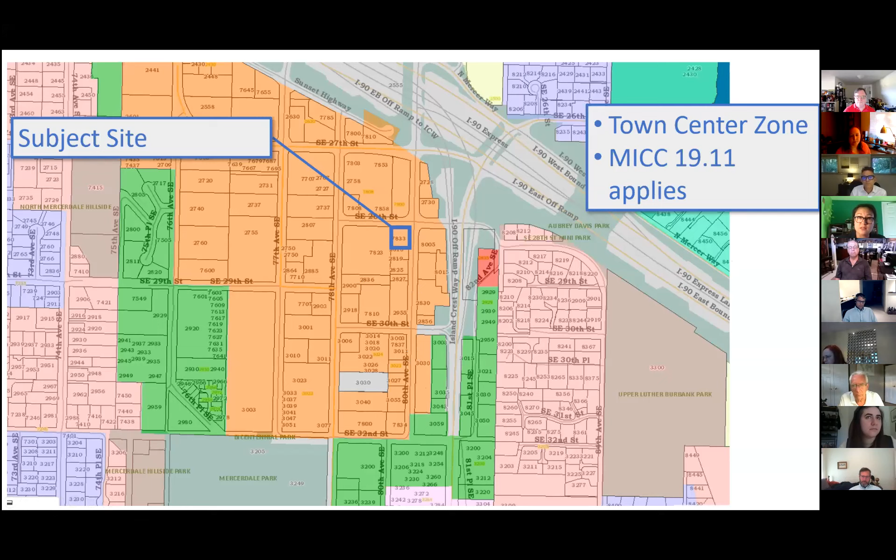Since the site is within the town center zone, Chapter 19.11 of the city's code applies. The proposed scope of work is to replace the fuel canopy and pumps, as well as add a small addition to the convenience store on site and redo the exterior of the convenience store.

I'll go over the code point by point once the applicants have had a chance to speak to the project, but I'd like them to introduce and tell you about the design before I dive into code.

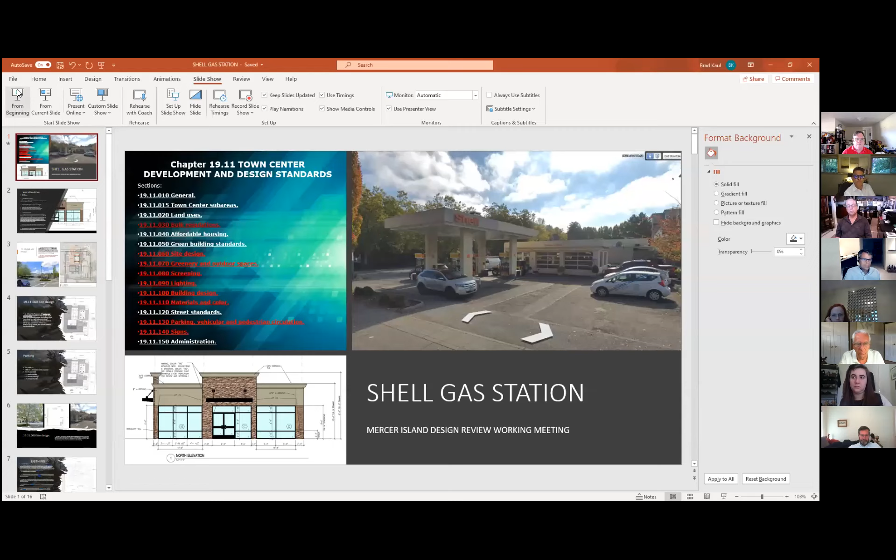Okay, so like Robin was saying, I brought the code into the different slides that I have here to go point by point through it. I don't know if that's the proper way to go through this, but maybe first I'll find a couple of slides here of our site plan.

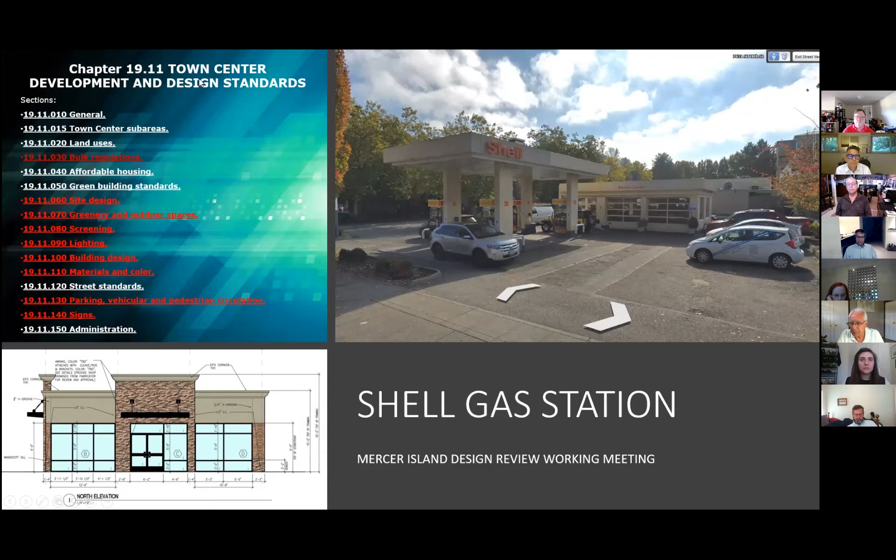Just to review the existing conditions, I guess that's what this plan is. So here we have our existing canopy and fuel pumps. Right now, there isn't an existing grocery store or convenience store. It's a two-bay auto repair shop with a small office and 2 toilets that are accessed from the exterior.

And then as far as, you can see the picture of the existing pumps and the existing old repair shop building. So what my client would like to do is replace the existing fuel pumps with new ones.

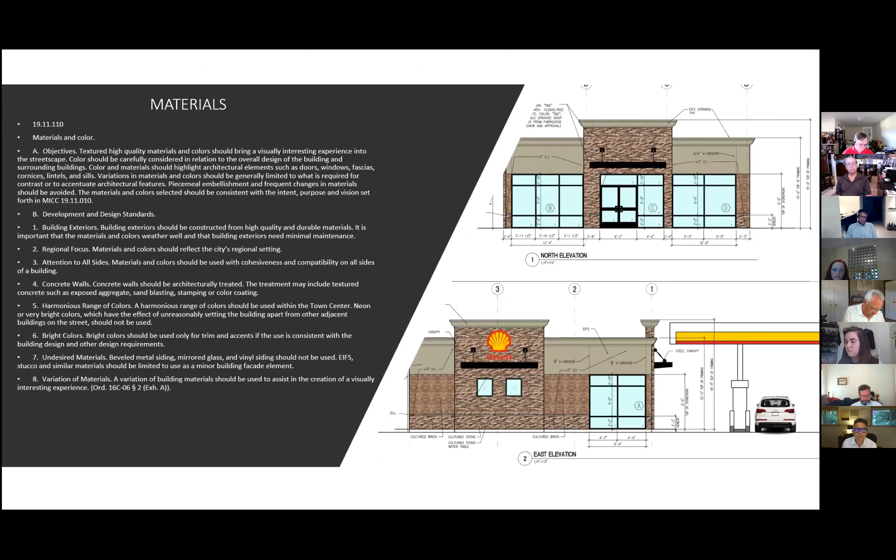I don't know what we should do next - go through the code, go through individual pieces. What do you think, Robin? Or does anybody have any questions?

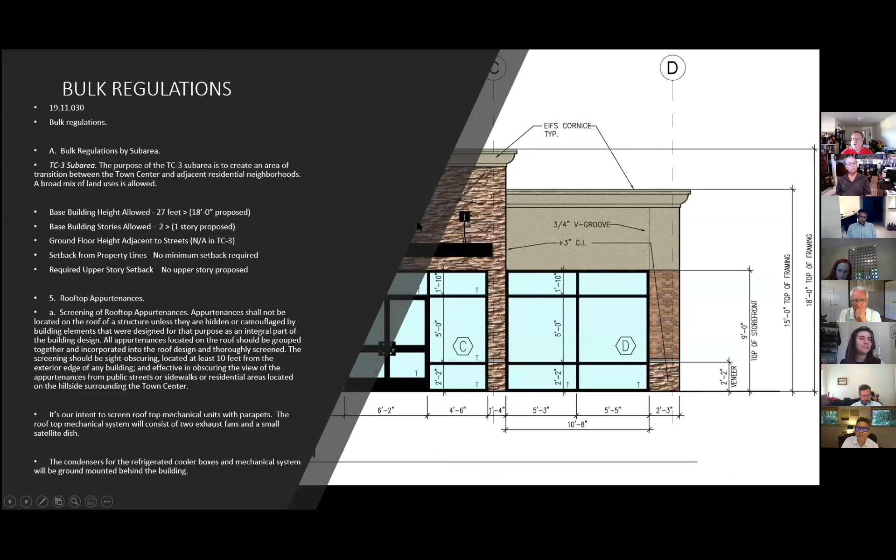Yeah, if there's any questions about the design choices, maybe that's a good next step. Otherwise, I'm happy to dive on in and start talking code. That sounds good. Commissioners, did you have any questions?

I think I'll come back to them once I've heard from you, Robin, though, since some of them are tied to code. My guess is you'll answer a few of them, so I'll wait. Hopefully, yeah, I was going to do exactly the same thing. So just signage and colors and that sort of thing.

So should I stop my share? I can come back later. Once Robin's done. I think Commissioner Grambois has a question now.

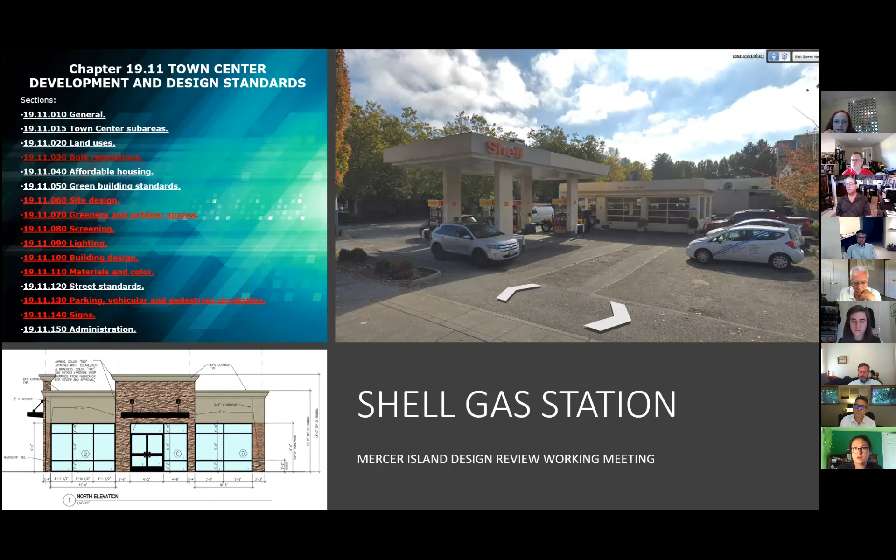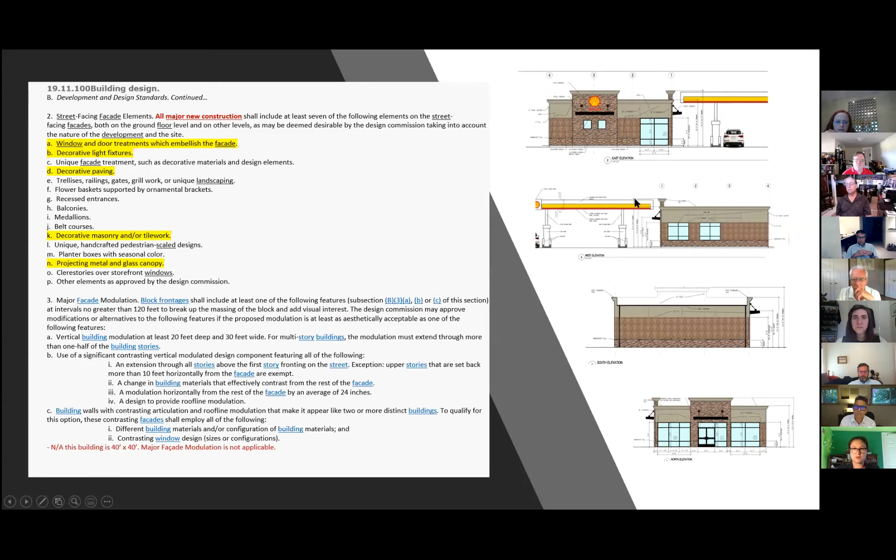Is there still going to be an existing service station, or is it going to all be a convenience store now? No, there will still be existing service, the service station remains, so we'll have the pumps, they're shown here. Right, the gas. But there'll be no auto repair, it'll be all convenience store. Okay, no more auto repair. Okay, thank you.

Okay, Robin, go ahead please. Go ahead. Okay, thank you. I'll reshare my screen here. Okay, can everybody see my screen now?

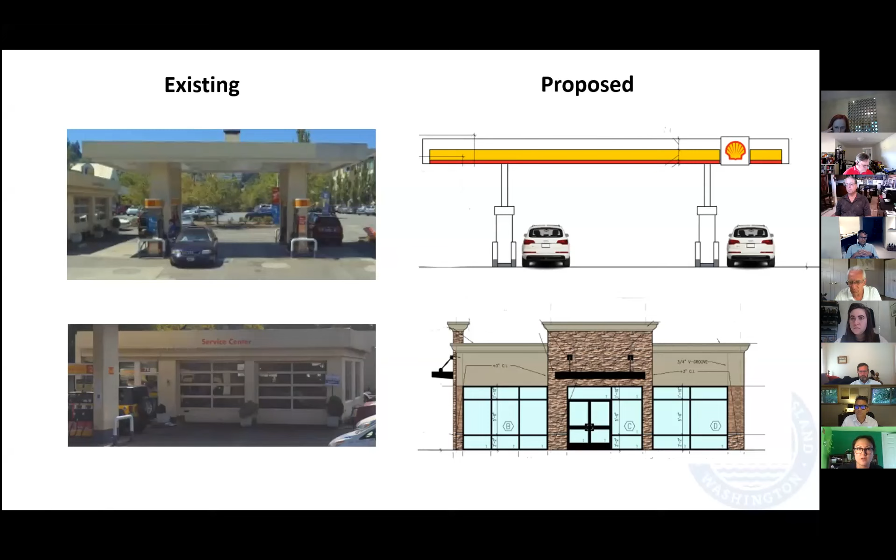Yes, okay excellent. So I'm just going to run through code section by code section. I did have a couple of questions that came up during the course of review, but I'll raise those as I come to the appropriate code section. So the first code section has to do with bulk regulations.

The code sets a base height limit of 27 feet, and in addition there's also the average daylight plane standard requiring buildings to step back at 25 feet in height. The fuel canopy and convenience store are both proposed to be 18 feet in height at their tallest point, which is comfortably under both those standards and therefore consistent with code.

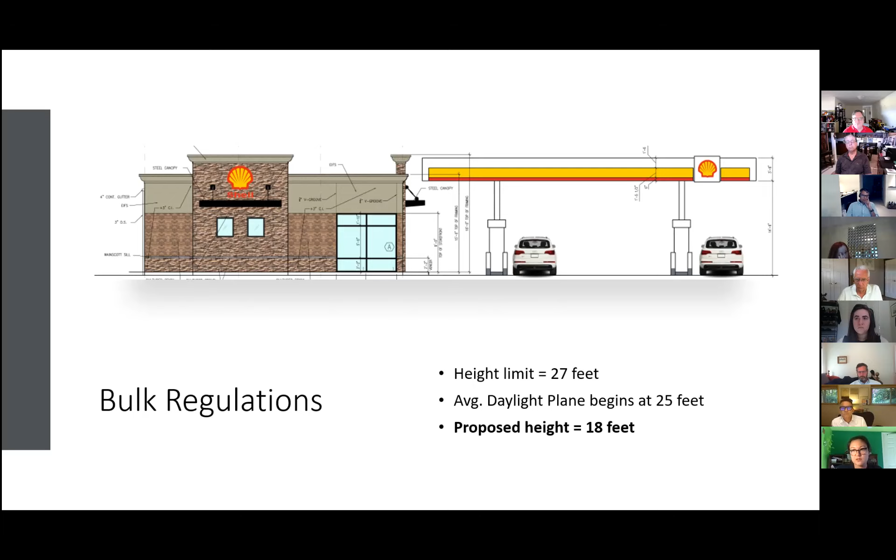Lighting is required by code to be pedestrian scale, LED or low wattage, shielded and integrated into the overall design. Here the lighting fixtures are proposed to be installed at just under the canopy, so just under 18 feet, or on the sides of the convenience store building at 8 feet in height. Both of those support generally a pedestrian scale.

LED lights are proposed, consistent with the code. The lighting fixtures will be shielded either by being installed underneath the canopy or through use of a shielded fixture, as will be the case on the building mounted fixtures. The plans specifically call out a model that's full cutoff shielded. In both cases, the lights will be installed on the buildings themselves, integrated into the design as called for by code.

On to building design. Building design standards require articulated transparent facades along pedestrian rights of way, which here are the north and east facades along 28th and 80th. There the proposed design includes articulated windows consistent with this standard.

The applicant also updated the design this evening, which was updated since your packets went out. The west facade is also now going to have windows too, so the side facing QFC to the west will also have transparent facades.

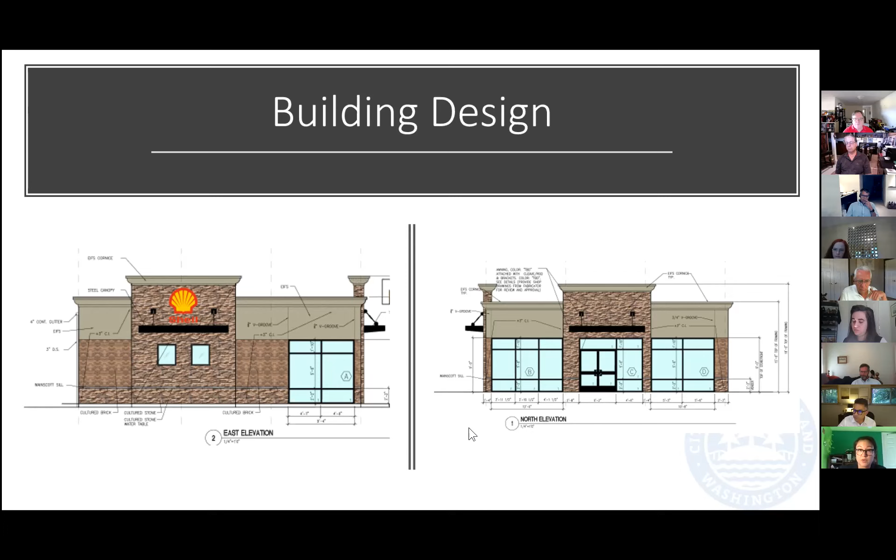This code section includes a prohibition on untreated blank walls, which are defined as a wall over 6 feet in height with a horizontal length greater than 15 feet that does not include a transparent window or door. Currently the south facade includes a wall that meets the definition of a blank wall.

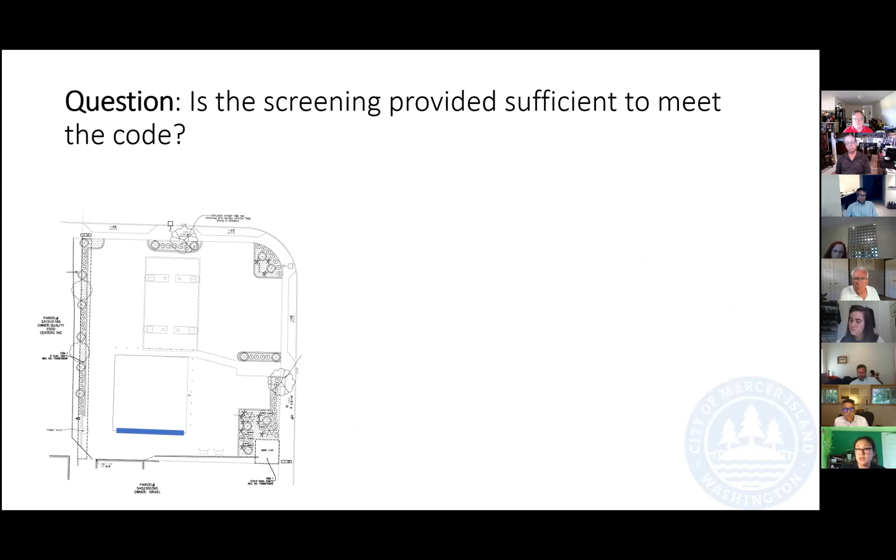However, the code does include suggested methods for treating blank walls, which include, among other examples, landscaping with planting materials sufficient to obscure or screen at least 60% of the wall. Here there's a hedge along the southern property line that's fairly tall. It blocks the view between the convenience store and the medical dental building to the south. I would submit that the hedge sufficiently screens the blank wall and is consistent with the code.

But this is one question I wanted to bring to the design commission at the study session: do you agree that the hedge in place is sufficient to screen the blank wall? We can either break open now and talk about it, or discuss it at the end, but I did want to flag this issue and run it by you. Let's discuss this as part of a group of questions after we've gone through the whole thing. Thank you, Robin, very good.

Quick question with this photo here, maybe Brad can answer it. How tall is the existing building there on the right? My question is how much taller is the new building going to be relative to what we see there? I think it's like 2 feet taller. Okay, and just 10 feet parapet, closer to the hedge. Yeah.

So it's just the parapet, is the existing parapet shown there? We're going to go up another 2 feet to try to screen any exhaust ducts, but the roof itself would be the exact same height. I see, okay, thanks.

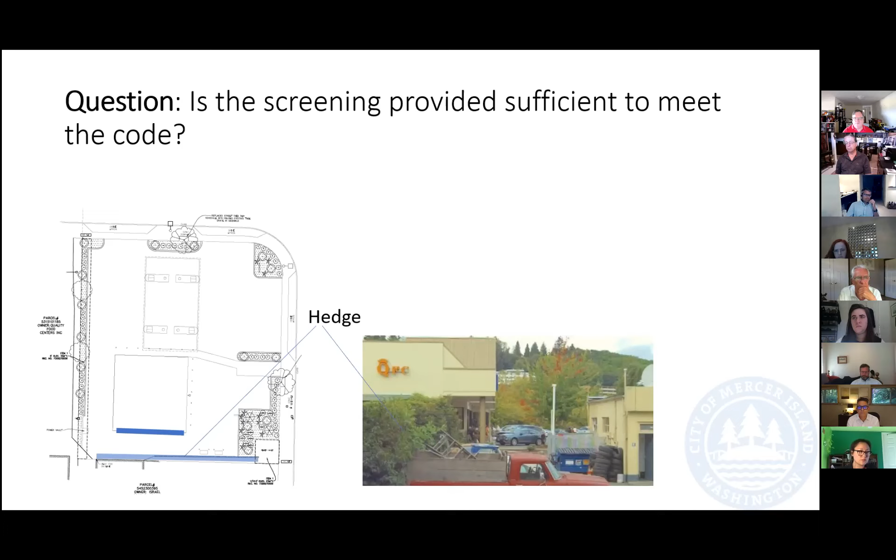Good, on to materials and color. The code requires the use of high quality materials, a cohesive color palette, variation in materials, and limited use of bright colors. The proposed material palette here is earth toned, with bright colors used only on the sign and fuel canopy.

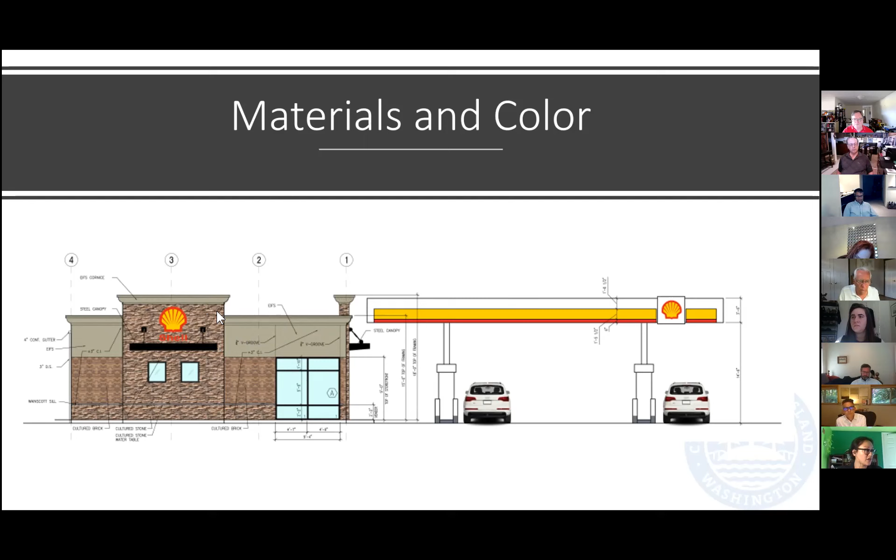The code does include a standard saying that EIFS should be limited to use as a minor building facade element. In the elevation shown here, the EIFS is this taupe color on top. So the question I wanted to bring to the design commission is, does the design commission agree that EIFS is used as a minor building facade element?

If not, since this code standard uses the term 'should,' we can review the chapter objectives to see if the codes could still be met. Recall that when the term 'should' is used, there is some flexibility with the code. So, one more thing to flag for later.

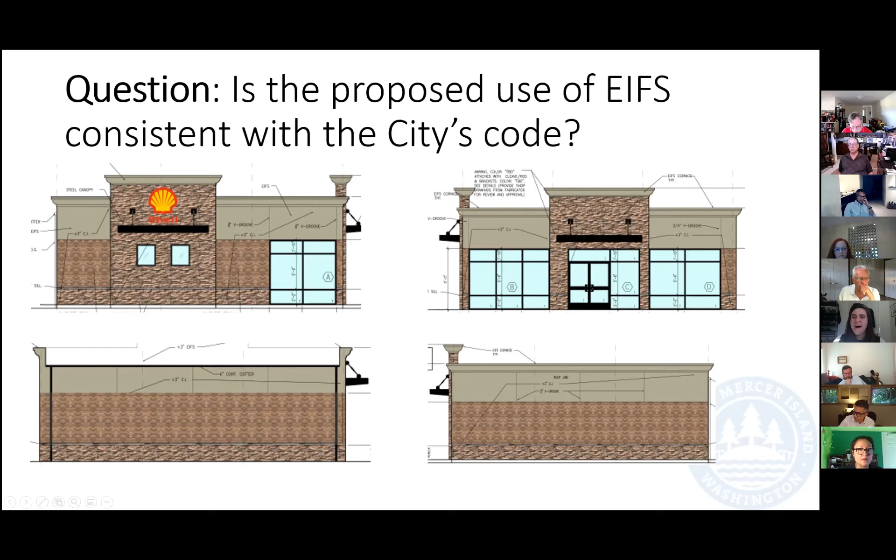Parking standards are tied to the size of the building. Here, the convenience store is proposed to be just under 1,600 square feet. General retail uses are required to provide 2 to 3 parking stalls per 1,000 gross square feet. If we took the 3 stalls per 1,000 square feet, the higher standard, that would yield 4.8 required stalls. Here, 6 stalls are proposed, which would more than be enough for the worst case scenario.

The last section is signs. I should have specified in my staff report that 1 wall sign per business on each street frontage is allowed. A sign is defined as any series of letters, figures, design, symbols, lights, structure, billboard, trademark, or device intended to or used to attract attention to any activity, service, place, subject, person, firm, corporation, or thing. Based on that definition, I understand the Shell logo to be a sign, and therefore only 1 per business per street frontage would be allowed.

So here on the east elevation only, there are 2 logos. My read of this code is that one of them would need to be removed given the standard, but again, happy to have this discussion with the design commission if you understand the code differently.

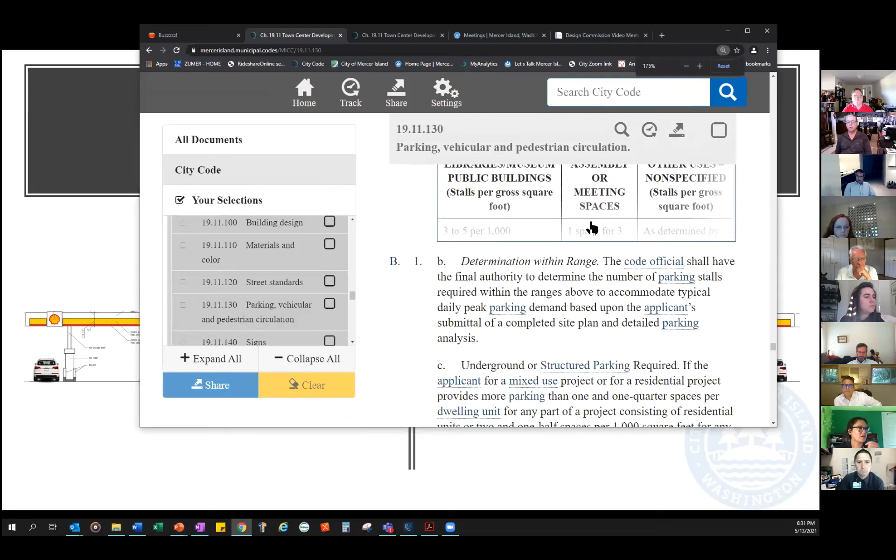And what's the code regarding the west face that doesn't have a street adjacent? It looks like it could be flexible. I'm just going to bring up the code here. Oh, pardon me, it speaks to driveways. So, and sing out if Brad and Matt, if you don't think the driveway, the west side doesn't really have a driveway. I think there's kind of a pull in there. Basically, it says...

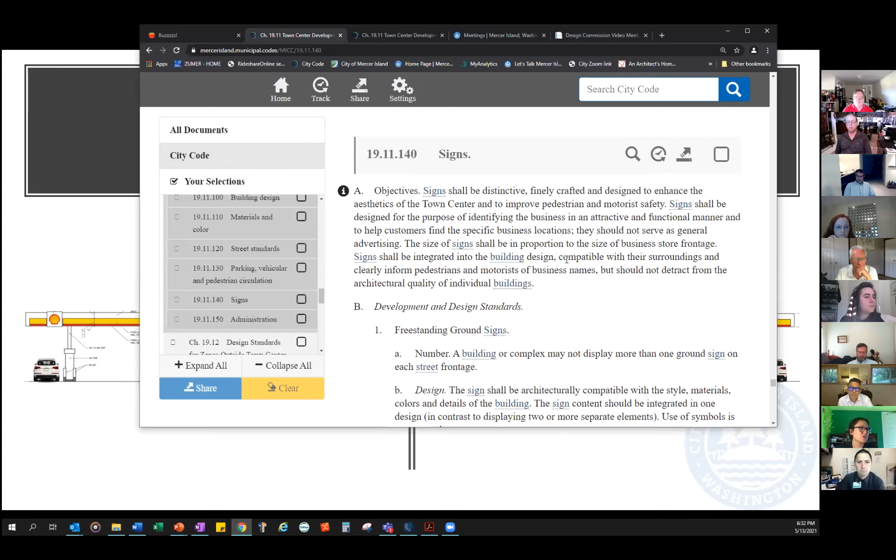So one wall sign occupying businesses facing streets, one sign per business for street frontage. However, commercial use occupying a building, oh, pardon me, whose only exposure is from a driveway or parking lot. Never mind. So it looks like there would not be a wall sign allowed on the west side because there are already building faces adjacent to the north and east facades.

And commissioners, we'll get to discussion here in a minute, but it's important to note in the code that Robin just brought up, that these are shalls, these aren't shoulds.

And so, you only get one wall sign. And I think the argument would be, well, are we treating these two separate businesses side by side, and therefore each gets one? That's the only way this would fly.

So just bear that in mind as we get to discussion. But also in terms of the west facing one, their proposal with the little shell on the eave wouldn't be allowed. That's all, they only get one. Because it's a driveway, it shall not qualify for a second wall sign, if that's even a driveway. Right? We're not even sure that is yet. The driveway would have to extend all the way along the edge of the building to the back.

And it looks like in this case it's a moot point, because commercial use whose only exposure is from a driveway or parking lot - in this case, that doesn't even apply. There's already the 28th and 80th street facades. So it looks like I understand this to be no wall signs on the west side of the building.

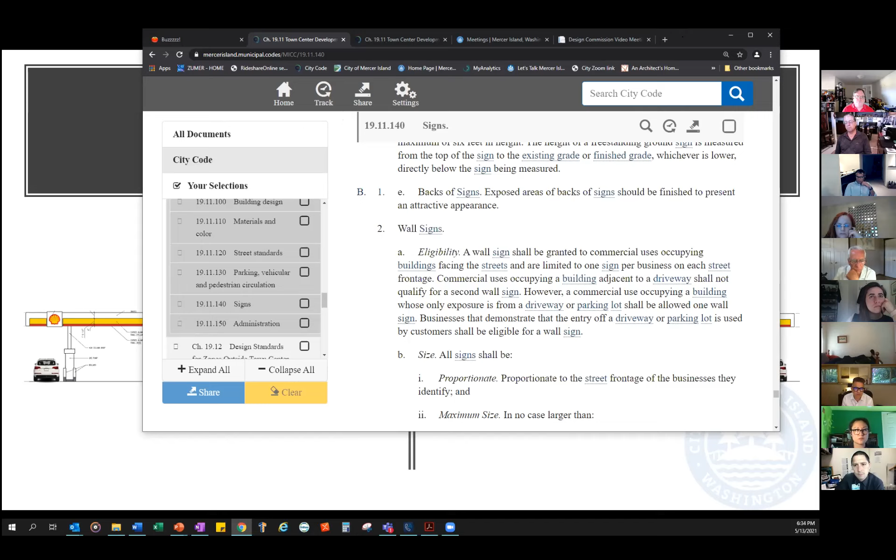And understanding that, one of my questions has to do with how you are going to be signing for the gasoline costing - you had a word for it, but I think of it as a blade sign against the street. So you will have street facing signage facing west and east if it's similar to what's in place right now. Correct, but it's a separate piece of the code. But it's separate from the code, exactly.

Mr. Randish? Yes ma'am. This is Commissioner Grambois. Is there a picture of a location, or can you give us an address of a location that you would like the Mercer Island location to look like? I know you said...

Well, yeah, we've built quite a few of these. We just built 4 stores in Eastern Washington because we do the whole state. They're much larger stores, they've got fast food franchises in them, but the answer is yes. And the codes are a little more, I guess you could say, quote unquote lax. But they're still, yes, I do. I can probably put something together and email it to Robin for the group if that's okay. I've got some pictures. Yes. Thank you.

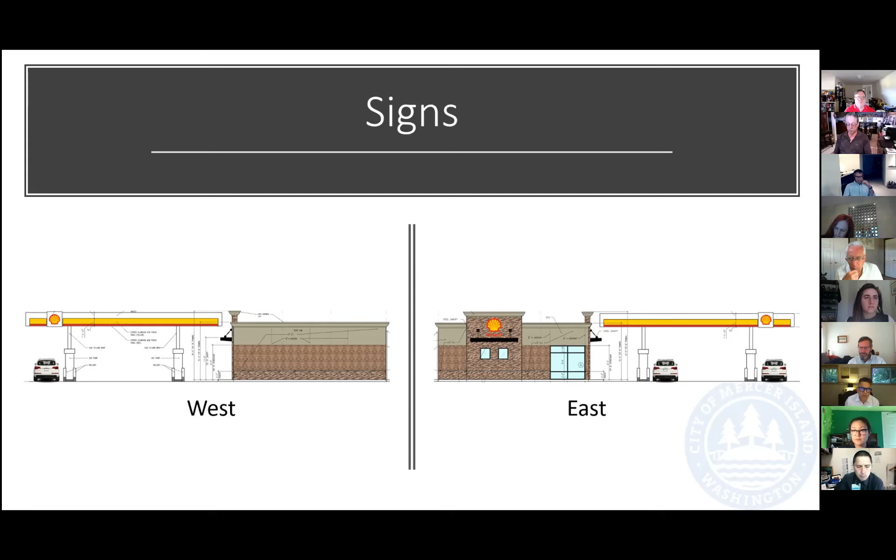Are there any other questions about anything we went over, or other code standards where I could be helpful? Robin, I've just got a quick question. In your diagram talking about the parking, is it that 2 of the parking spaces are EV? Are 5 and 6 in the diagram those EV? I believe they are - yes, it's 5 and 6 that will have charging stations. Brad, please correct me if I'm wrong, but that's my recollection. Yep, that's correct. Yeah, great.

And is there any provision in the code regarding parking requirements and how much - what percentage of that can be EV? And again, just so you understand, I want to advocate for EV at every occasion. I just want to make sure that we're appropriately counting on that. I don't think our code foresaw EV charging, or didn't think to address it. So is the code silent on whether parking spaces, or how many parking spaces, can have EV charging stations next to them? I believe so. Okay, Robin, great.

Robin said that there is a requirement for 4 spots, and since 2 of them are EV, there's still 4 remaining. I thought it was 4.8, wasn't that right? It's 4.8, and as we discovered last time, the code is silent on how rounding should work. So my thought was that even if we rounded up, that would require 5 spaces - 6 are provided. My understanding is that this is ample, according to the town center code.

Great. And then, if necessary, maybe there's some sort of provision - one of those 2 EV spots would be dedicated as EV only, and one would be open for general use. I think that would be consistent with code. If I may speak. Okay, well, would you go ahead?

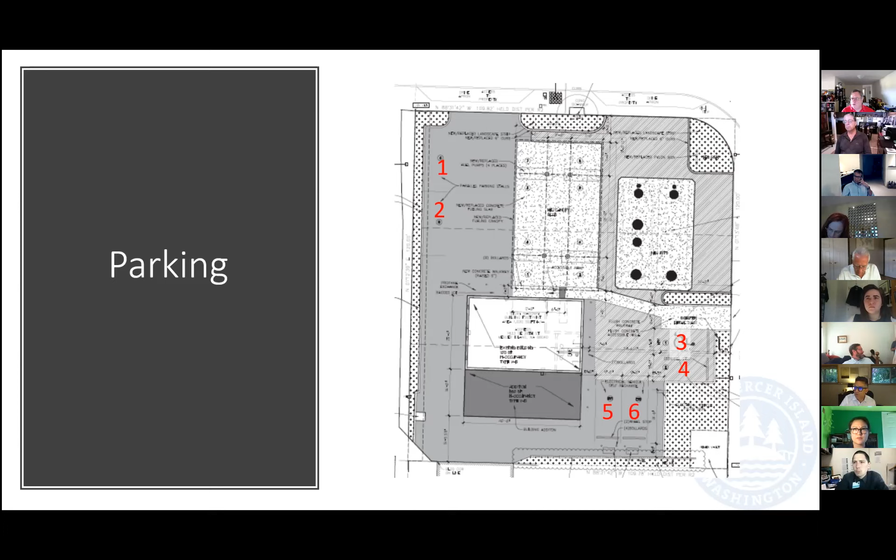I had a non-design issue, just for what it's worth. I had one slide on tree retention.

I didn't include this in the staff report because it's not a town center design standard, but for what it's worth, tree retention standards are in chapter 19.10, and they allow tree removal when it's necessary to protect public safety or enable construction work when an owner has used reasonable best efforts to design development so that it doesn't remove trees. Here, tree removal will be contingent on the degree to which excavation is needed, and the extent to which excavation is needed won't be known until there's more investigation done about possible contamination on the site.

So the review of that is ongoing. And what the city arborist has done in the meantime is lay out what tree retention standards would apply in different scenarios that he's reviewing.

Just to give you an early heads up of what your public hearing will look like, the Design Commission is actually the decision authority for tree permits within town center. So expect that to be part of your public hearing. If trees indeed need to be removed, the tree permit will need to be part of the public hearing. So just giving you a few heads up there, that's all.

Sure, we want to discuss that also. As far as my understanding, there are studies to try to estimate where contamination exists underground, but of course, who knows where it really is until you start digging. So when we were speaking with Public Works, we wanted to outline the worst case scenario and have all our ducks in a row should the worst case scenario come about, where we're digging all the way to the property lines and digging down 20 feet and shoring that whole thing like we're excavating out for a 30-story building.

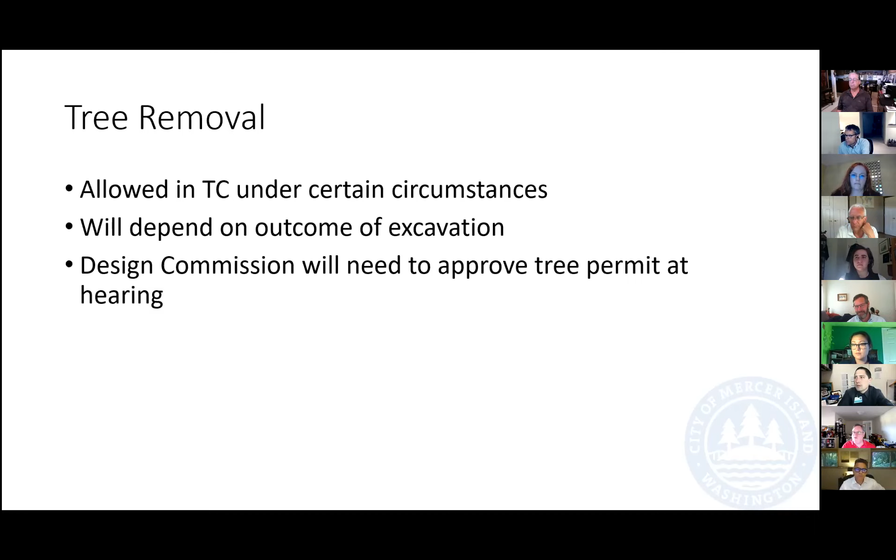Okay. Robin, anything else? Not for me. Okay, thank you. Unless we need to do something else regarding protocol, Andrea, I will open us up officially to discussion, although we've already been doing quite a bit of discussion, which is perfectly fine. Discussion is perfect, thank you.

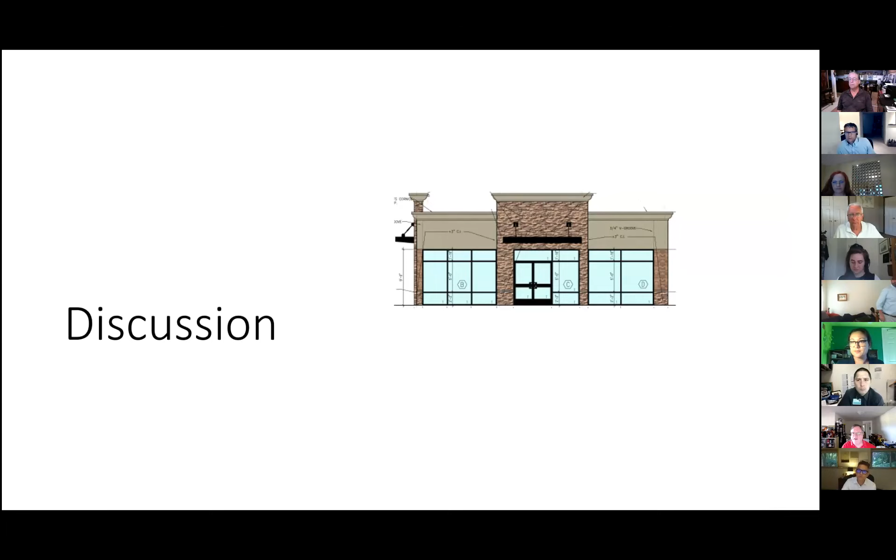Does anyone have an image of what the west facade will look like with the new glazing or the additional glazing? Brad, I think that was in your presentation. Yes, I do. Okay, would you bring that up for me one more time? Yeah.

Okay, and that remaining chunk of wall to the south of that right-hand window is less than 18 feet? Yeah, it's about 18 feet. That's where the cooler box is. My question is, is it less than 18 or more than 18? Right, because that drives the determination of whether it's a blank wall or not. Okay.

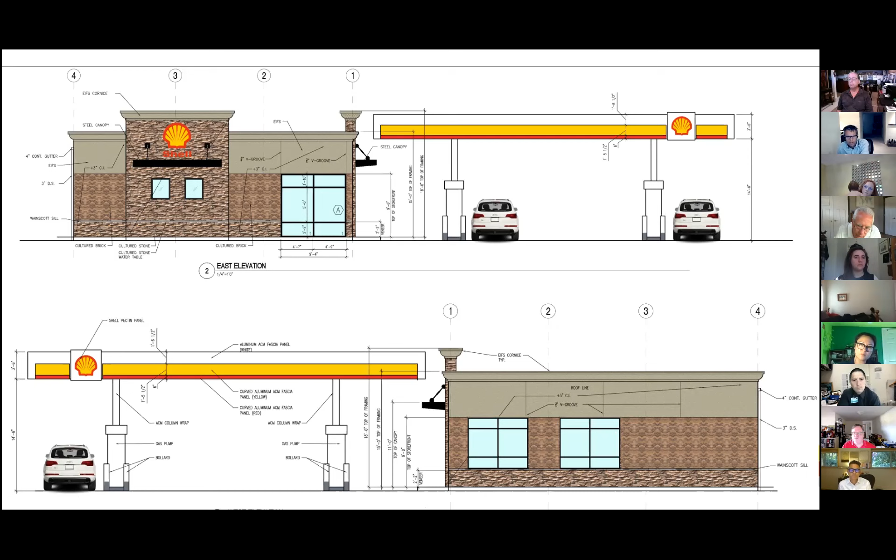Let me see if I can open AutoCAD and figure out how to do that. Can I stop the share real quick? Yeah, no, that's fine. I don't think I've seen them. Let me see what I got here.

And while Brad's working on that, I can bring up the site plan again. There is also a line of trees and landscaping on the west elevation, with proposed cherry trees, rhododendron, and boxwood. So if what is currently proposed on the west elevation qualifies as a blank wall, then perhaps we can look at the landscaping to determine if that screens the blank wall sufficiently.

So coming back to that, I've got 19 feet 4 inches from the edge of that existing window to the edge of the new addition. Okay. But on the east side, you're pushing out a chunk of the building with that different material, so you're breaking it up that way over there. Yeah, correct. So technically we have two blank walls, one on the west and then the entire south.

What are your plans for the use of the exterior space on the west and south side of the building?

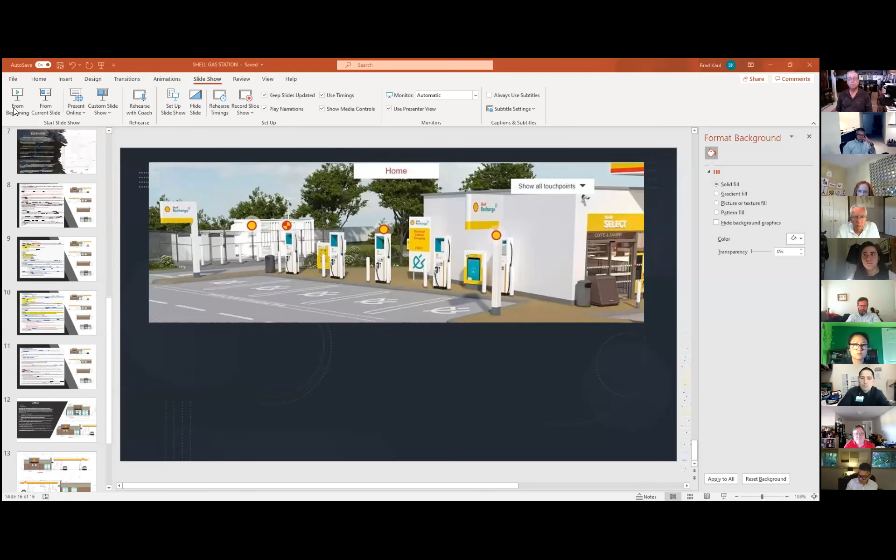Right now that whole building's drainage just comes off the back, so we're going to continue that slope to the back with a gutter and downspouts, tied to the new storm drainage system we've designed. And then, laid down on the ground on some new concrete pads would be the compressors, either stacked or, I think easiest, just laid down on the ground right behind the cooler boxes.

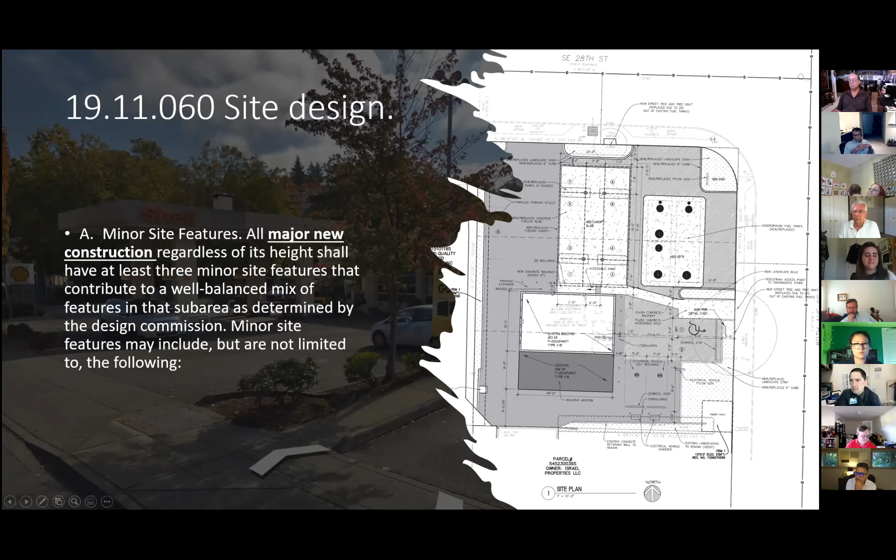Do we have any further items for discussion? I've got an item regarding the signage. Going through and taking a look, we don't see anything—would love to see what you're proposing for the street front signage. But more than that, the canopy. I see a lot of examples of similar canopies within the corporate branding standards, and quite a few of them look neon lit or internally illuminated. Can you describe what you're doing in terms of the illumination on that yellow and red in this submittal?

Yeah, I believe that these are— go ahead, Matt, you know better. No, I can help out there. I don't know if this really showed it all that well. I can't remember if the Jackson store has the shell image on the current shell image, let's put it that way. I think it does. You see the red, and then the yellow—the yellow is like a teardrop, and above it that's actually white, which is part of the canopy wrap. Looking at this, you can't really tell that; it just looks like that part is white.

The red is an LED string—all LED that goes through it and illuminates inside, but it's very mild, like Christmas tree lights in an enclosed plastic string that goes all the way around. That's what the red is. So it's not just red and yellow, it's red, yellow, and then white on that lined out area. That's the actual image of the canopy.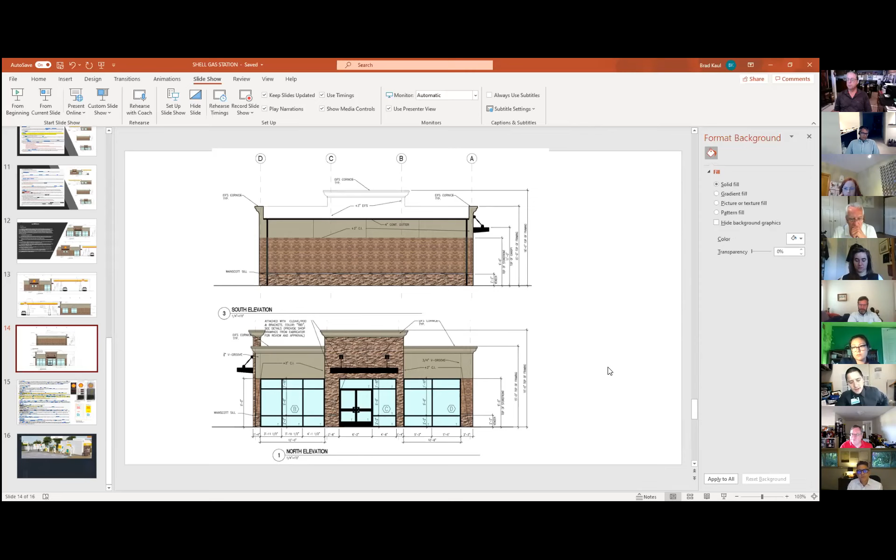To that point, Chair Edwin's point, on the east wall there's these two small awkward windows, which I assume are behind the countertop, but we can't know because we don't know what's inside. Yeah, so those two walls, that was just to try to not have a blank wall. So we have high windows going into a bathroom and a high window above our prep. Kitchen prep. They're just there because code wanted them.

But maybe they don't need to be. I think you could make the argument that the materials and the change in plane, I'm assuming there's a change in plane and that the piece with the windows actually bumps out a little bit. Am I seeing that right? It bumps out about 10 inches. Okay.

Yeah, because it was. Tom, do you agree? Does everyone else agree? Makes sense to me. I mean, I just feel like the proportion of the windows to that wall seems awkward. It'd be nice if they related to the storefront windows a bit more, but if there's a wall in between them, it's gonna be hard.

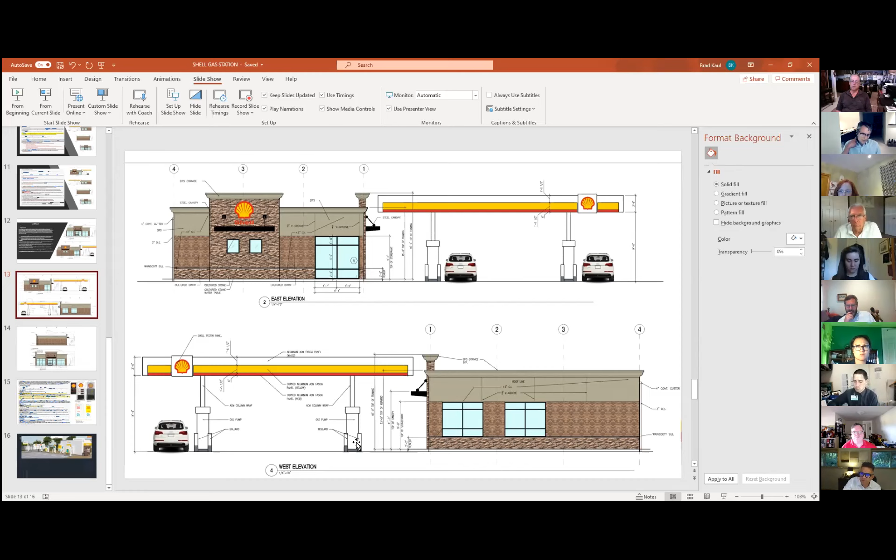There's a new Fred Meyer down in Renton, a new gas station, they have stone wrapped columns and it looks really nice. Your columns are between the two pumps, right? You just have a single column at each pump. Correct, so they're pretty well protected.

But Bob, your point's taken, Shell may say absolutely not, we'll have to see. That part's fine on that, as long as... so if we could bring something from the building onto there and then take that gray and bring it back to the building, I think that we start to tie things together.

So the column thing, I don't mind that idea really. And with that, that won't be an issue with anybody with Shell, we'd be able to push that through.

But I would almost think, has anybody ever been to Sequim? There's a big Chevron, the tribal Chevron up there. Back in the day I was a consultant and did that store before this job. They have a big square, it's brick, but it's a big huge site too, and they have the stonework and it's square and it looks good. That's like the most beautiful gas station in history up there. Yeah, it is.

Bring it to Mercer Island. No, we're gonna give you one here. We're obviously close, I think. We're just trying to put the icing on the cake and tune it up here, that's all we're doing, and we're willing to do that. But the basic thing that Shell wants, as long as they have their canopy and their basic image, we can do whatever we want with the columns.